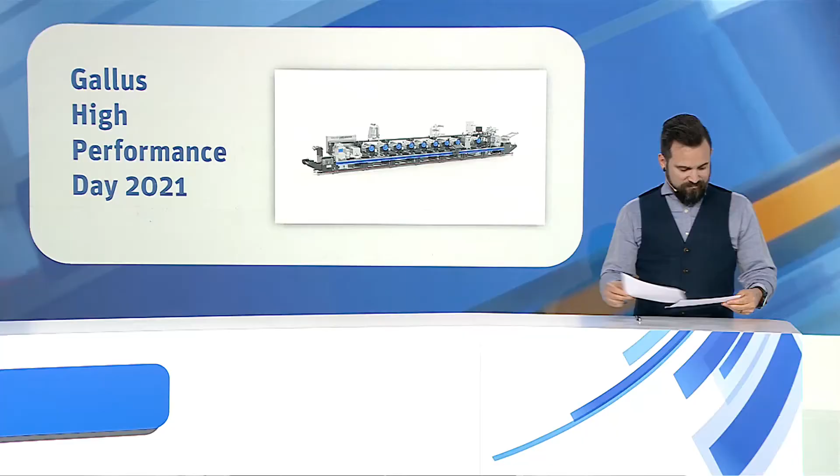You have decided for session B, where we present our Gallus Label Master, followed by a demonstration of the Gallus RCS 430. We will show you in detail the use of a digital print bar on the Gallus Label Master, and after the demo comes the Champions League of embellishment on the Gallus RCS 430. This machine is featured with a Pantec Rhino hot foil embossing unit.

Following these presentations, we kindly ask you to participate in one of our 3 breakout sessions. In session 1, I will talk to Martin Leonhardt. He will explain what low migration and GMP are all about. In session 2, I talk to Oliver Vetter. He's the head of the Screeny business unit. He will answer the question why screen printing is still a viable and indispensable printing process in the narrow and mid-web segment. And in the 3rd session, Vladimir Tilupin from Avery Dennison will show us which substrates are particularly suitable for UV inkjet printing and what needs to be considered.

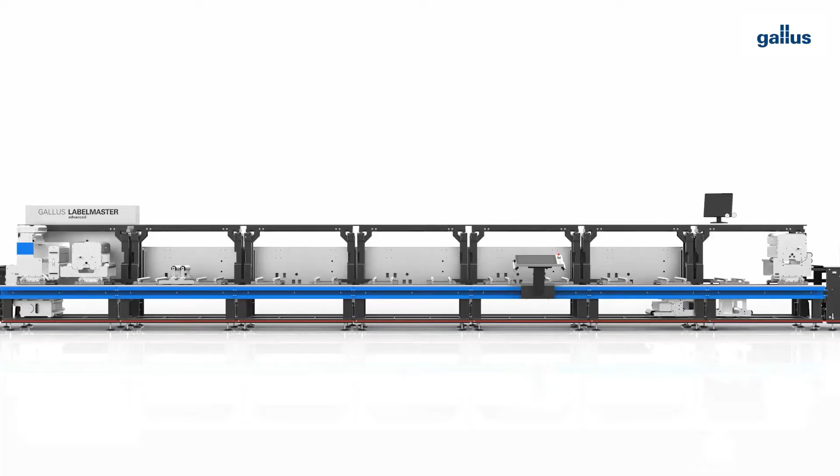It had its official product launch at Label Expo in 2017. Since then, we have sold more than 160 of these presses, the fastest ramp up for any new product in our Gallus history. It is the ideal combination press with high automation and maximum flexibility, which you can combine in unlimited ways. The machine system consists of several identical multi-process platforms.

Multi-process because the concept of the platforms allows us to do different types of operations. The Label Master is so flexible that you could print Flexo or screen in this position. But you also could do die cutting, hot foiling, or embossing. Even third-party equipment such as a web shifting device can easily be integrated. This is why the Label Master is called the most flexible press in its class. It is the perfect machine system for you and for your customer needs, not just today, also in the future.

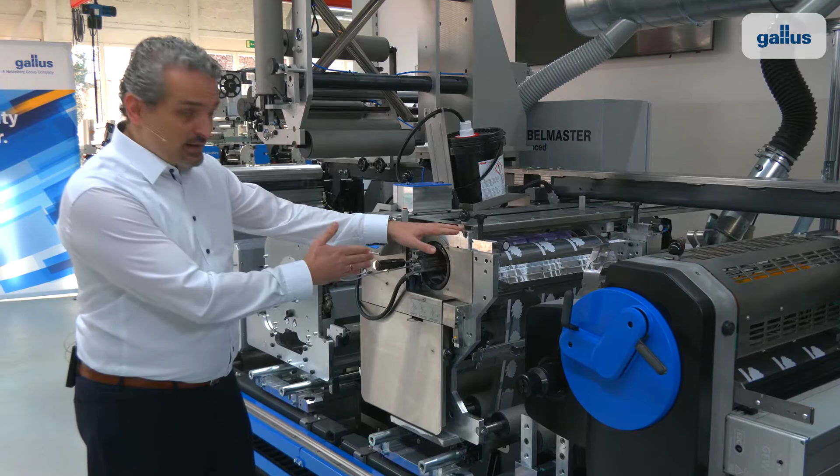The Gallus Label Master uses Flexo printing units in our standard, as you can see it here. But you can configure or upgrade it later with process flexibility. For example, on this machine, we have brought in a screen printing unit here in the primary process level. The Advanced line is fully flexible, which means you can change any process in any position. So for the first time ever, you buy only what you actually need and configure your machine to your own requirement. It's your choice. The Gallus Label Master with permanent processes in all positions, the Advanced, as this one here, with total process exchangeability, or any combination in between.

Let's have a look at the design of the Flexographic print unit. For example, these clamp and release systems of the printing cylinders and anilox rollers, or the adjustment wheels at the bottom here, are exactly where the operator expects them to be. So setup and control are intuitive and fast and can happen simultaneously on several printing units. We call it best spot interaction. It's just one of the ways in which the Label Master gets you right into successful production, beginning from day one with a minimum training effort.

The Gallus Label Master combines short setup times with high, reliable top printing speed up to 200 meters with a perfect print quality and maximum register accuracy, regardless of the substrate. Now, I will hand over to Leon, who will explain the technical features in detail.

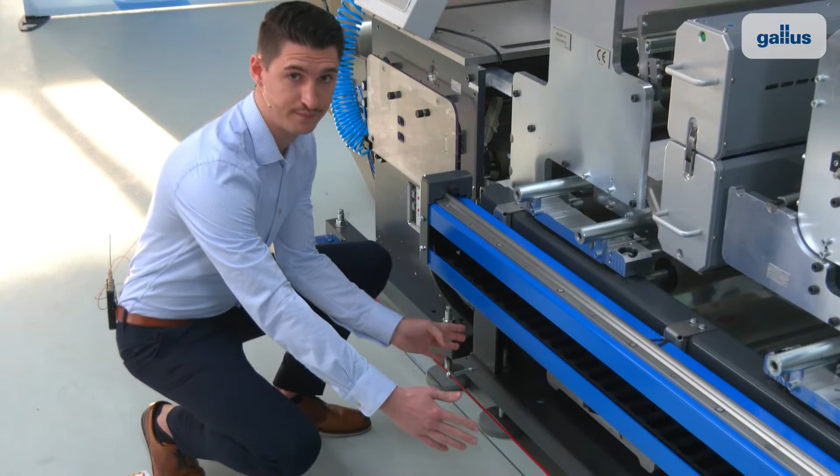After the unwinding, we have here the splicing table with the dancer rollers right here to ensure the optimum tension at the unwinding process. Starting from the web edge control, we are talking about the web conditioning area. And after aligning the web, we run it through the corona treatment in the third level here. There we optimize the surface tension, and next we have a both side web cleaning. At the end of the conditioning area, we have the first of two web tension control units. They ensure the perfect web tension during the entire print process.

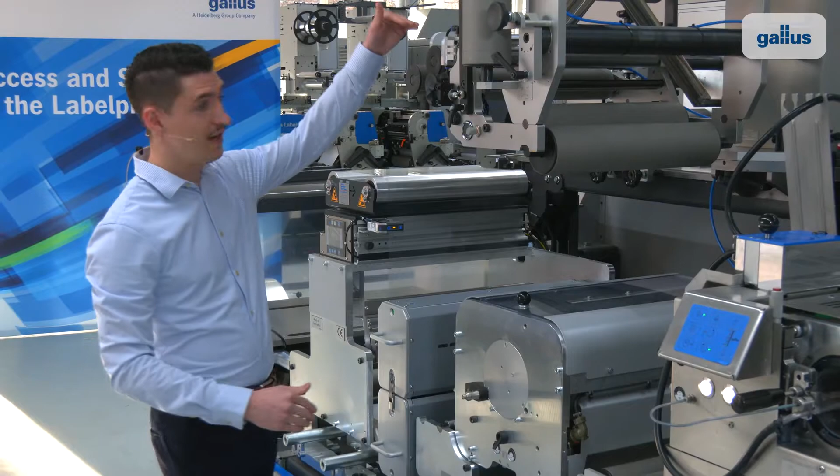At all Gallus presses, we are always talking about 3 levels. So we have here the primary level, the secondary level, and here the third level. One of our main philosophies is operator friendliness, and that's why most of the operations are on the primary level here. Here, for instance, you can see on the secondary level the web turn bar with the possibility to print on the glue side by using the delam-relam unit right here. In the third level, we have the possibility to integrate, for example, a hot air dryer for water-based applications. At this Label Master, we have an anti-static at each position to prevent loading.

Starting from the unwinder to the rewinder. And here it's an active one. Every multi-process platform has 2 printing positions. And here on the first position, we have our screen printing unit. While Werner is preparing the unit for the job, I would like to mention that not only the entire screen unit, but also the screen material is made by Gallus from our Screeny division. That means you get all from one hand.

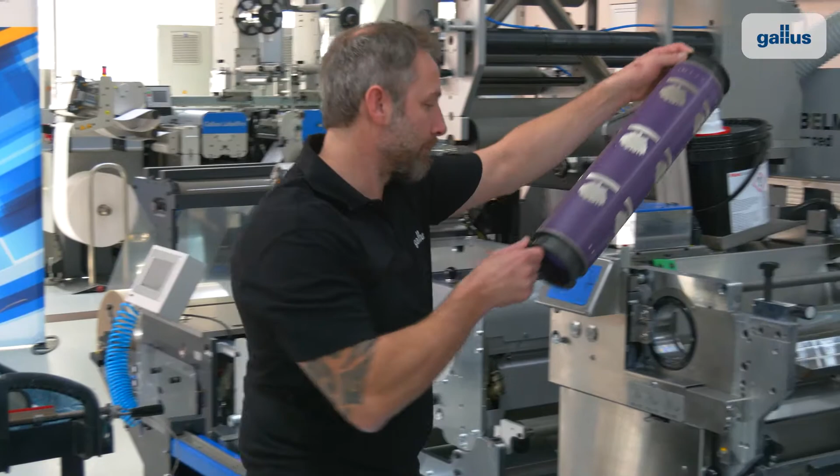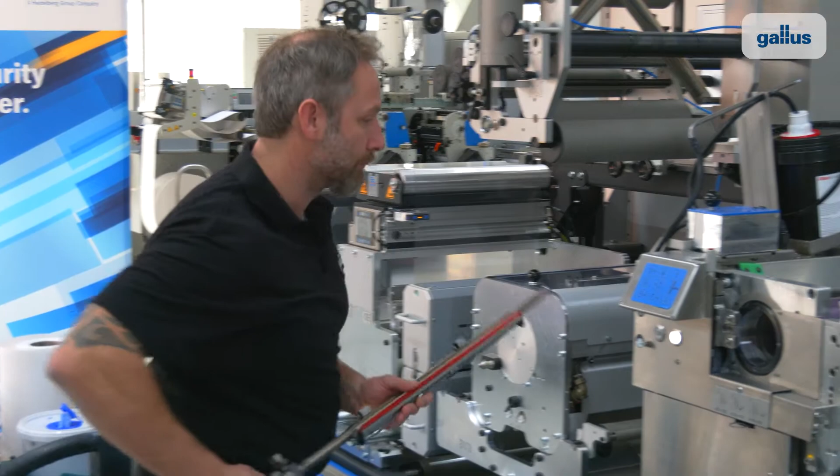The screen printing unit is on the primary level, which makes it very economical to handle. You can see the setup is really easy and quick. Our operator has to put in the screen cylinder, adjust the squeegee, and connect the hose for the ink supply, and that's it.

The setup of the Label Master flexo printing unit is as follows. The ink chamber with the anilox roller here is in direct contact with the printing cylinder in this position. At the beginning of the week, the operator is setting the pressure between anilox roller and print cylinder on this adjustment wheel here. By being able to adjust operator side and drive side independently, we ensure that the print cylinders are 100% parallel to each other. So, as I mentioned, this is done once.

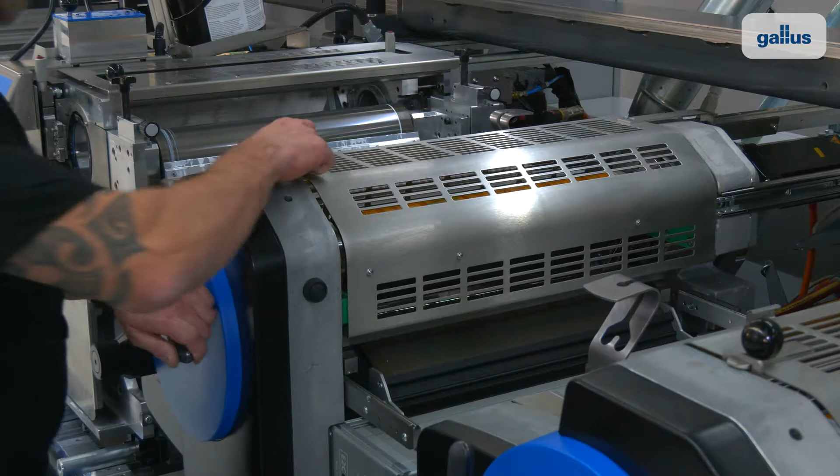The same function we have for the setup between print cylinder and impression cylinder, right here. This is how we achieve the highest print quality. At these 2 positions, we use these handles to open the anilox rollers and the print cylinder. We show you now how fast the operator can replace the cylinder. After he opened the cover and the clamp, it is easy to remove the cylinder and put it on the trolley. So then he takes the new cylinder and places it in the holder of the unit. As you can see, this takes less than 10 seconds.

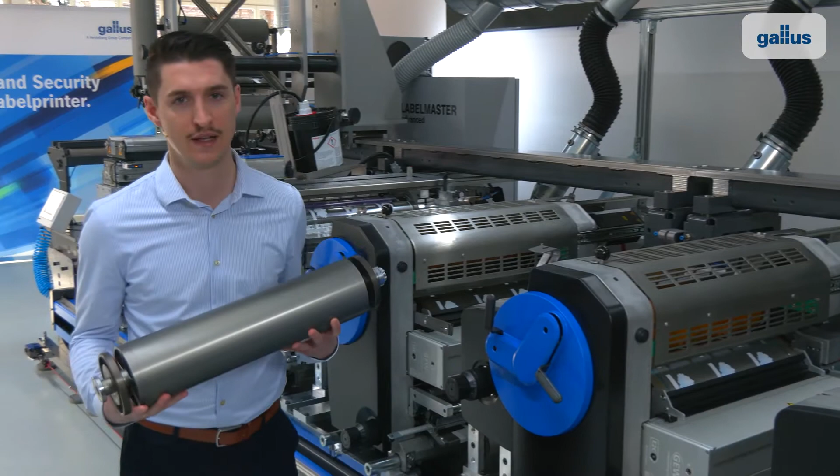So let me take one of the print cylinders to explain the concept. Thank you, Niels. First of all, you can see that I can hold the cylinder with one hand. It's quite light. This is a lightweight aluminum construction, but with a very robust design. It is solvent resistant with an unlimited lifetime, and the repeat range is from 8 up to 25 inch.

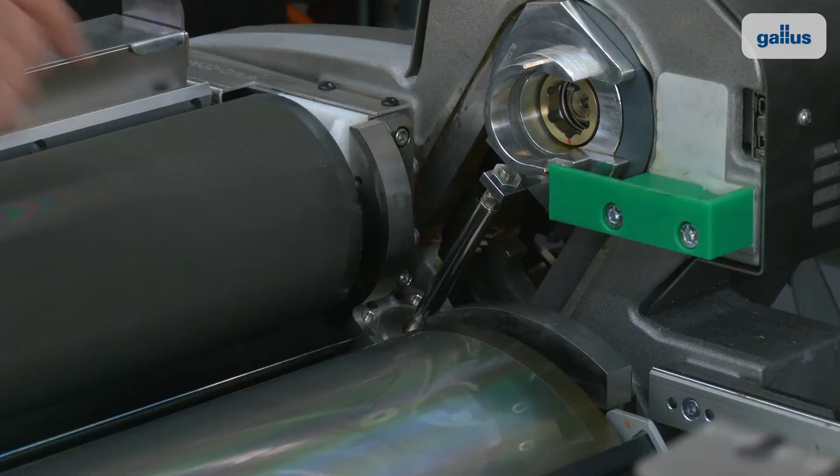So take a look here at these two metallic rings on the left and the right side. These are the bearer rings. They ensure that the print cylinder is always in the same position with the anilox roller and the impression cylinder. That means there is no under or over pressing, and we achieve immediately the required printing pressure. Thank you, Niels. Compared to other printing cylinder systems, Gallus cylinders give you a stronger print quality with lower cost and easier use.

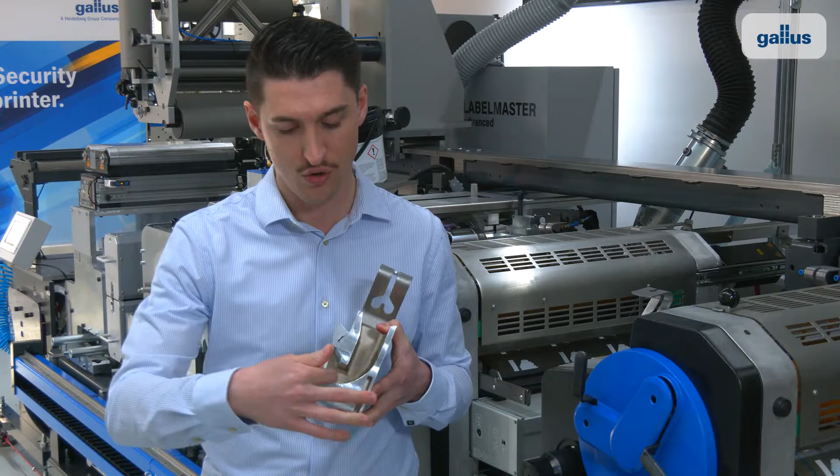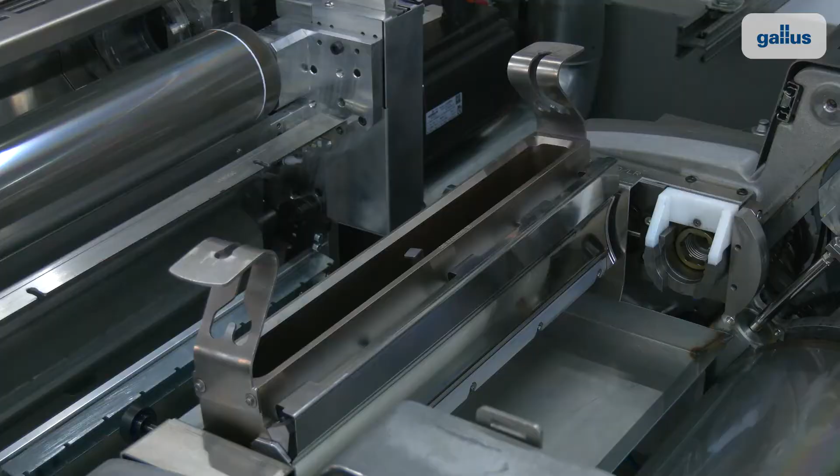So now we demonstrate how fast an anilox roller and the ink chamber can be exchanged. Let me first show you a cut through of one of our ink chambers. Thanks again. The chamber has a patented design. The surface is specially coated and has this round shape. This ensures that the ink is flowing automatically to the anilox, and we need the minimum of ink in the chamber. The surface and the form of this chamber also guarantee that there is less ink foaming. Thank you. So Werner could already insert the anilox roller and the ink chamber. We would be ready for production.

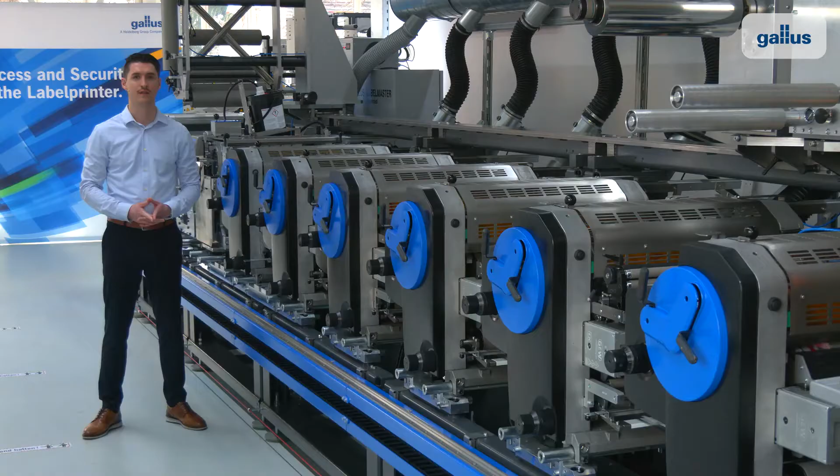Here, after the impression cylinder, we have the dryer. The impression cylinder is cooled, of course, to have a stable substrate temperature and best possible web transport. This setup allows us the shortest web path possible in our industry. So let's move forward to position number 6. Here we have the possibility to do cold foil embellishment. This is another process done on the secondary level. Same as the web turn bar, you can move it to any position of the press.

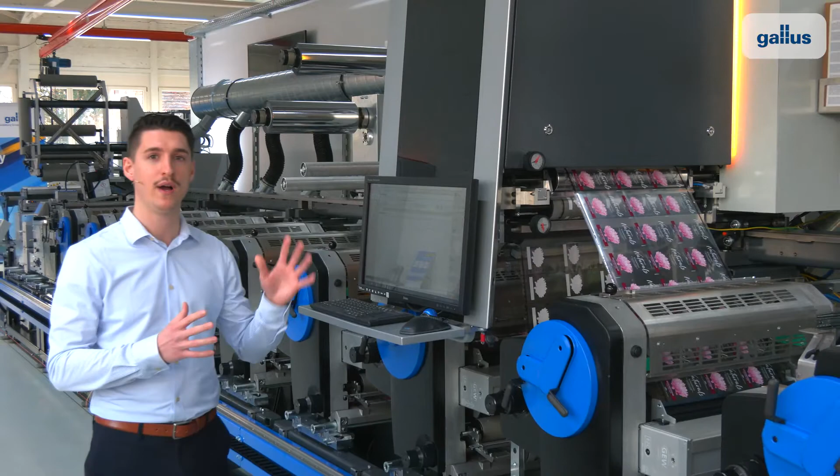And this brings us to the next highlight. This is our digital print bar white edition. In the application we are printing, we are able to vary the language of the digital text during the running production. It is also shiftable along the entire machine system on the secondary level and can print high opaque digital white for underlay or text with 600 dpi resolution, and that with speeds up to 70 meters per minute. We can apply a 10 micron ink laydown, which can give us a very nice relief effect. The good thing about the digital print bar is our easy to use interface that allows you to integrate it also into your other presses.

This here is our HMI press control. The touchscreen is movable and allows the operator to move it into any position he is working in at the moment. Also important, the main job presettings are saved in the job storage and can be easily recalled. This helps to achieve fast make-ready times for repeat jobs.

So let us talk about the register. The print cylinder concept, the printing units, and the process platforms are the reason why the Gallus Labelmaster is so stable in register. The Labelmaster has an automated length and cross register. But many customers, and Niels already mentioned that, we have over 160 installations, buy the Labelmaster without an automated control because of its high stability.

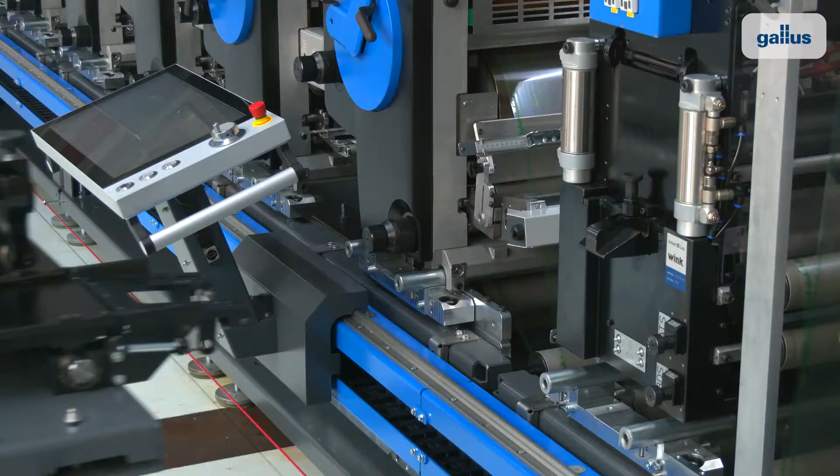At the next position, we are already on the outfeed section. Werner will now replace the die cutting cylinder. That's an easy job thanks to our new Gallus rotary die cut unit RDC Quick. And to replace the cylinder, Werner is now connecting the exchange trolley. The new cylinder is in parking position. The actual cylinder is already in the standby position.

So now he is just opening the side cover, takes out the cylinder and replaces it with the new one. A push on the touchscreen of the HMI brings the cylinder automatically back to the operating position. The entire change can be done in less than 30 seconds. The RDC Quick has a robust design with special impression cylinder support that guarantees consistent die quality even on thin PET liners. Another good feature is you can place this unit in any position of the press.

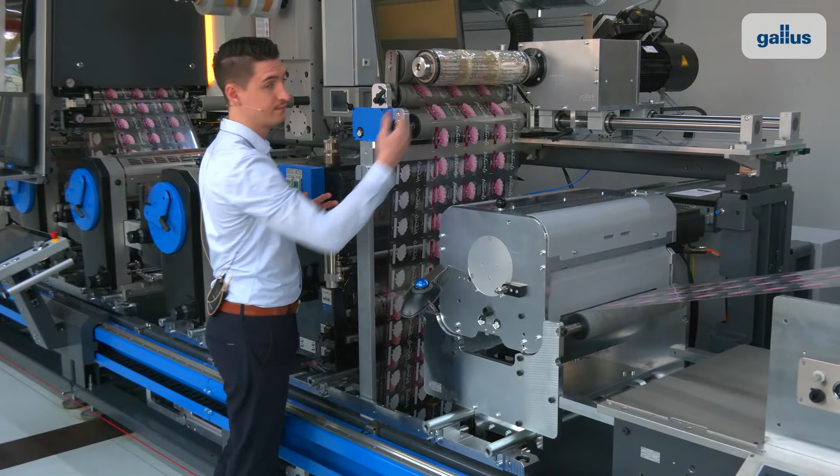So after the die cutting unit, we are coming to the matrix rewinder. We call it MR Touch. Touch because our roller here is in direct touch with the matrix roll. This allows us to rewind fine and difficult matrix shapes, and that without a risk of a break. Also, the roll becomes even and compact. But the most important thing, the matrix roll is at a good height to be exchanged by the operator.

Under the die cutting unit, we have the web video here, and it's motorized. Werner can adjust it with the mouse pad right here to the correct position of the register marks. At the screen up here, you will be able to see later the register accuracy of the Gallus Labelmaster. Same as in the front, we have here our outfeed web tension control unit. And at the end, we are rewinding finished labels ready to be shipped to your customer.

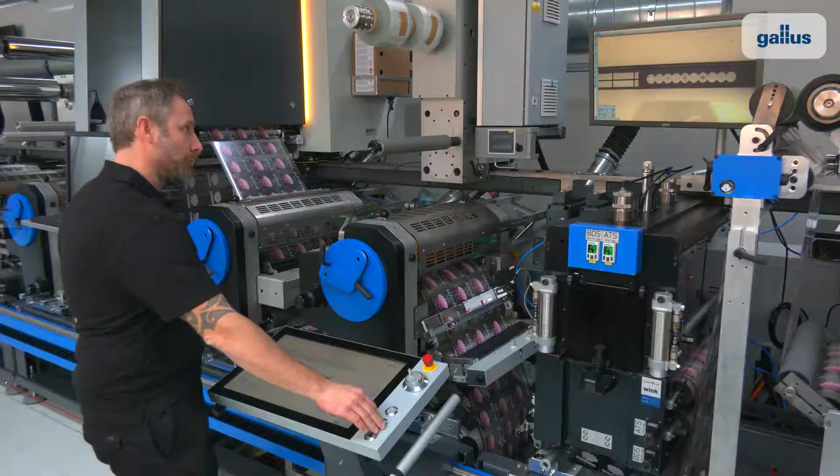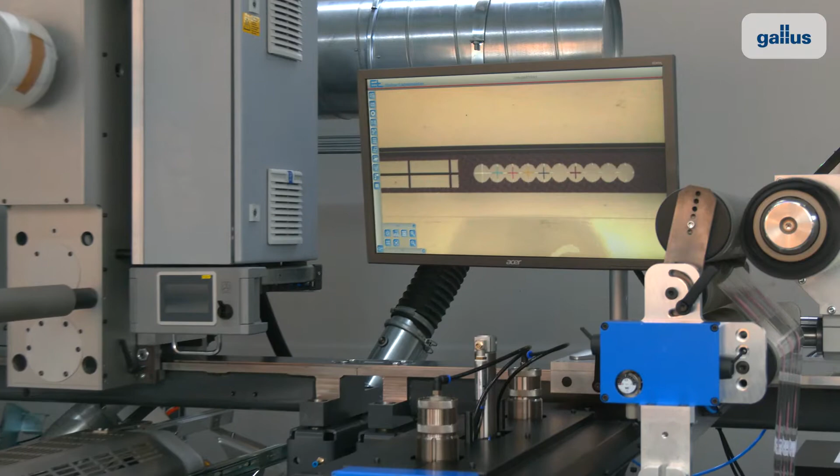So Niels, so Werner, I think we are ready to start the job now. Werner is quickly checking the impression of each unit before he ramps up to production speed. Afterwards, he is activating the register control, and the machine automatically regulates the printing into register by using web-to-web comparison with minimal waste of one machine length.

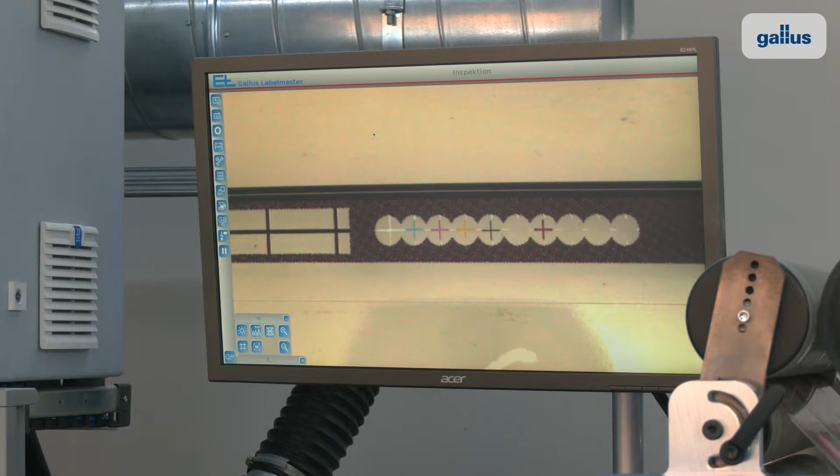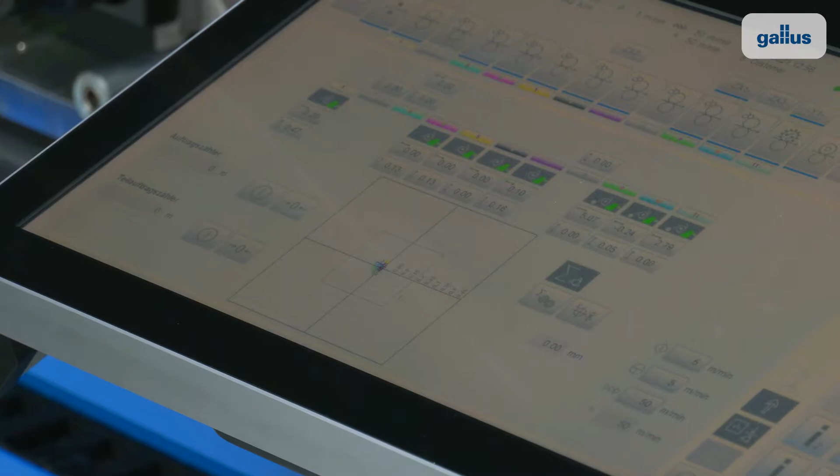On the screen up here, this is a screen of the web video, you can see that there is no movement at the register at all. Also here at the HMI, you can see that the register marks are quite centered and far below the tolerance. At the moment, we are running at a speed of 80 meters per minute. The Labelmaster is able to run up to 200 meters per minute. Of course, the speed is always dependent on the application. At this job here, we are doing special embellishments, so you need to reduce the speed to ensure the right quality.

As already mentioned, this digital print bar, white edition, is responsible for the variable text on our label. Everything happens with a simple click of a button. Werner can now change the language or an image while we are printing. Jobs can be loaded into the digital print bar by USB or Ethernet. On the job we are printing, variable text is added to some spots on our label.

Now let's have a look at our finished label. We are printing a shampoo label on PP clear substrate from Avery Dennison, starting with screen printing for a white underlay, followed by CMYK process colors and a spot color in station number 6, with an additional Sapphire spot matte varnish. Then the 10 micron digital white for the variable text is giving us a nice haptic effect, and finally the die cutting is finishing this label.

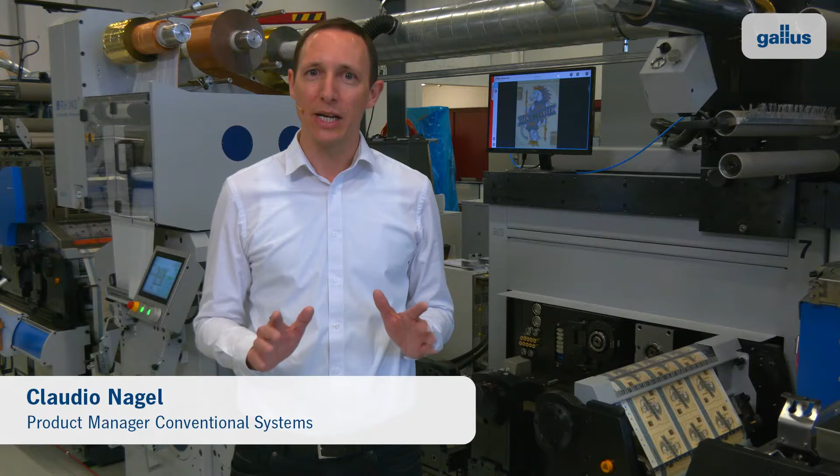The Gallus RCS 430 is in every aspect the flagship in our product portfolio, and I can also claim that it is one of, if not the best machine system in the label industry. Our customers who operate one or more Gallus RCS in their print shop supply the world's largest and most demanding brand owners with highly complex labels and packaging. This press proves every day that it is the most flexible and highly automated press in the narrow web market.

Dear visitors, we hope that you will be one of these customers in the near future. Within the next minutes, we will be guiding you through the unique capabilities of the Gallus RCS 430 and show that this machine is up to every challenge in a print shop. I will start now with a few technical explanations of the machine system.

The basis of the RCS is a very stable mechanical platform. This carries the independent stations which are equipped with the direct driven motor and interfaces which provide all media required, such as control system or compressed air, to operate the printing unit. The web runs independent from the installed printing process and doesn't need to be cut when the operator changes it. Thanks to that platform concept, the operator can switch between different printing units like flexo, screen, offset and hot foil within less than 5 minutes. This process flexibility and the certainty that this machine system is equipped for all upcoming challenges ensures future security.

Just as important as the mechanical structure, if not even more, is the control and drive concept. On this machine, we use direct servo drive technology. There are no mechanical transmission elements like gears or belts. The printing unit motor with cone clamping system is firmly connected to the printing cylinder axis, which carries the anilox, the printing or the impression cylinder. 3 identical drive sections are built into one printing unit, all accessible from the front and at an ergonomic height, regardless of the body size of the operator.

This system enables the optimized economic operation of the RCS. All other functions, such as the printing format and pressure adjustment, are also carried out by motors. Therefore, all job-dependent settings can be saved and recalled again for repeat jobs. This saves waste and reduces setup times massively.

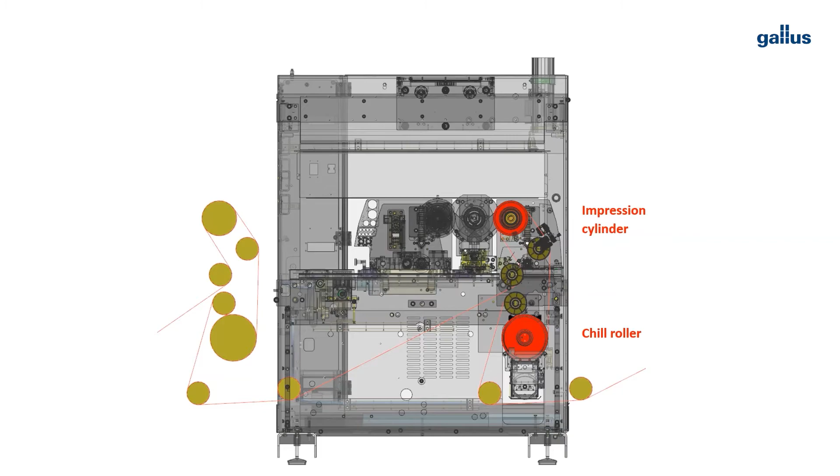This unique drive concept is as well the base for the outstanding web management of the RCS. 2 servo-driven rollers, here shown in the animation, the impression cylinder and the chill roller, with a large wrap angle, ensure perfect substrate transport and enable advanced functionality like the intelligent presetting function and the printing length correction. This leads to perfect substrate handling for pressure-sensitive material, monofoil, tube laminate and light cardboard, and finally to excellent register accuracy and reproducibility.

So let's have a look now to the configuration of our demo machine, which enables our very special label we have prepared for today. Leon will explain that press now to us in detail.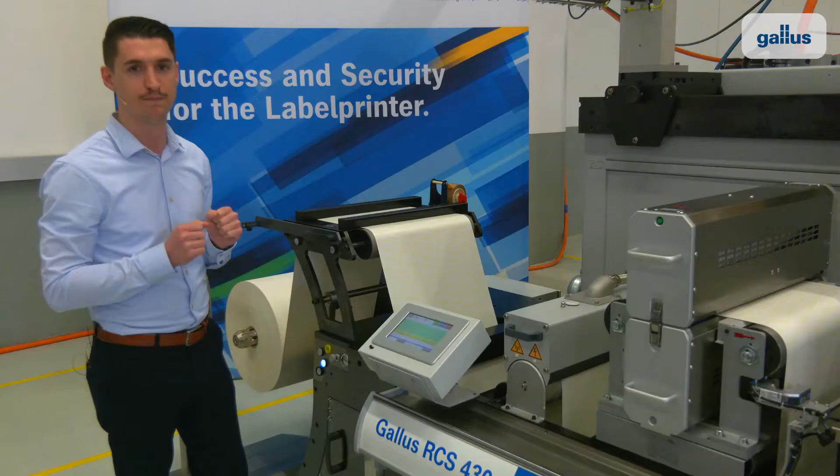For this job, we need in the first position backside print on glue. So that we are able to print on the glue side, we have to separate the liner from the pressure sensitive material and overpass it here to the relamination unit. With the top material, we can now run through the print unit and print on the backside of the label. Afterwards, we have to go up to the secondary level, relaminate the 2 layers and turn the substrate for our front side print.

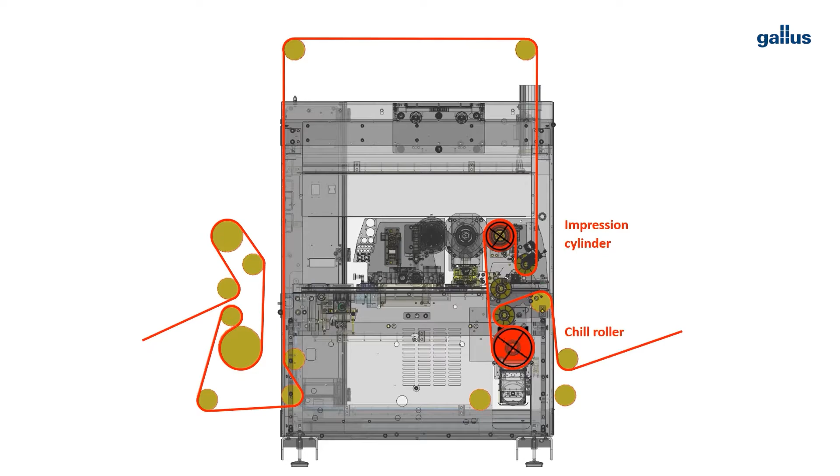For monofilm applications, we have a special solution for reverse printing here on the RCS. We can run the entire flexographic unit backwards, and that gives us the possibility to print on the backside without using the web turn bar. This will avoid scratches on transparent monofilms to 100%.

On this job, we are printing on a structured paper. And to achieve the highest quality, we print that image with the next 5 units in offset process. With every other printing process, it's impossible to get this quality on this high structure substrate. The RCS features a unique startup process that sets the ink-water balance inside of the unit before something is printed, and Igor will show this quickly.

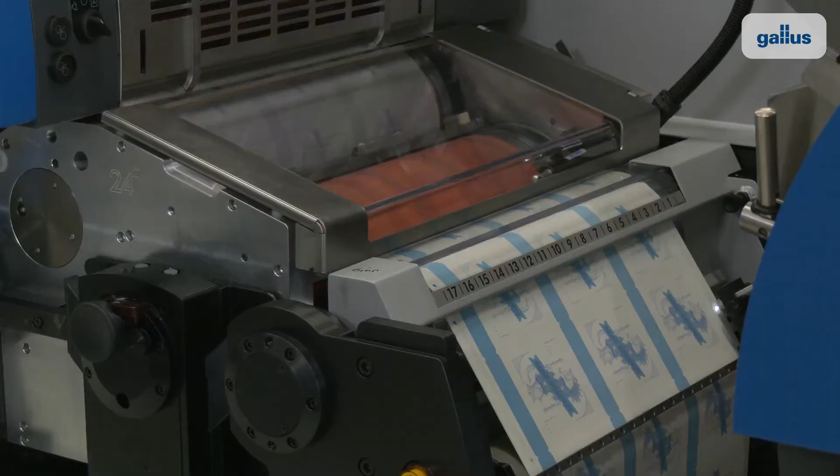The inking unit turns at 40 meters per minute, while the web just moves at 5 meters per minute. We make this possible by the use of the already mentioned individual drives on the Gallus RCS, which ultimately leads to a very low level of waste.

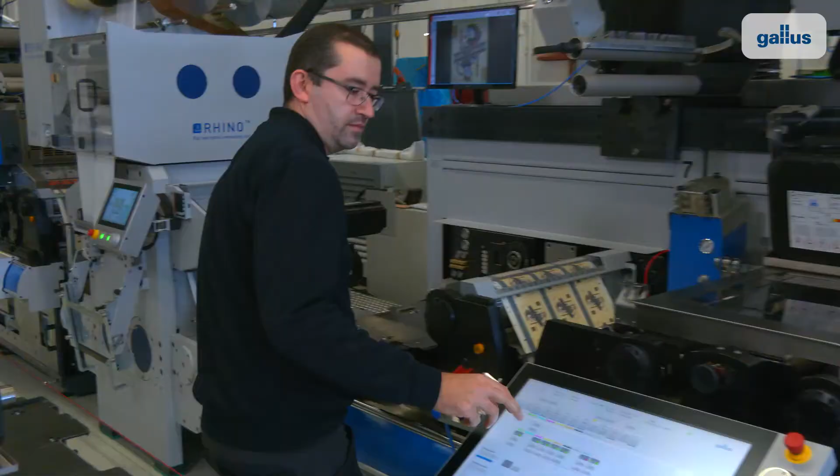That we can guarantee the consistently high print quality over the whole lifetime of the machine, we decided to use format cassettes, which contain the rubber blanket and the printing plate. The investment for this system is slightly higher than on sleeve solutions, but on the other hand, more stable and more reliable. So now we will show you how easy it is to do a complete process exchange on the Gallus RCS while the machine is running a job. Let's see how Igor will do that.

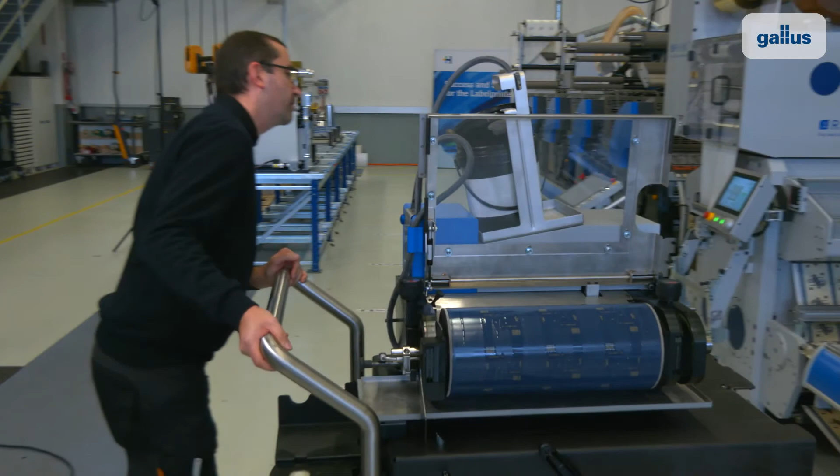The platforms are designed in such a way that the units can be disengaged, exchanged and re-engaged on the fly without stopping the production. This is made possible by the unique design of the printing units, which consist of 3 independent servo-driven platforms. The impression cylinder platform moves the substrate. The plate cylinder platform controls the printing cylinder, and the third platform moves the inking unit.

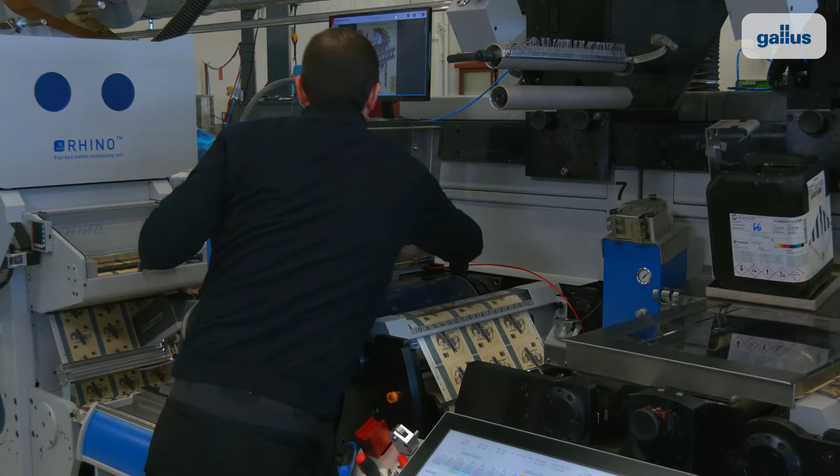This enables us to freely combine different printing methods such as offset, flexographic, screen, hot foil and die cutting on the same platform, and being able to change between them quickly and easily and without cutting the web. Machine operators love the system. The handling processes are identical everywhere, which reduces operating errors.

The Gallus RCS 430 control system identifies the relevant processes fully automated via a chip. This sets the printing unit up for the new process. All important data about the particular unit are now available on the HMI, and the process is ready to print.

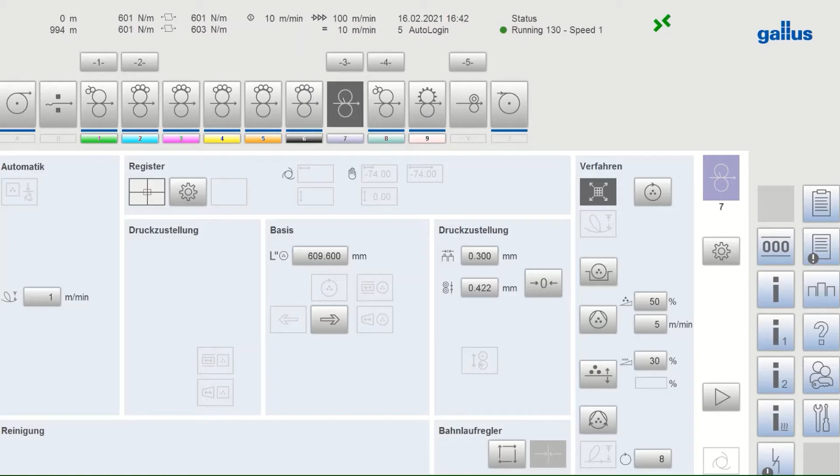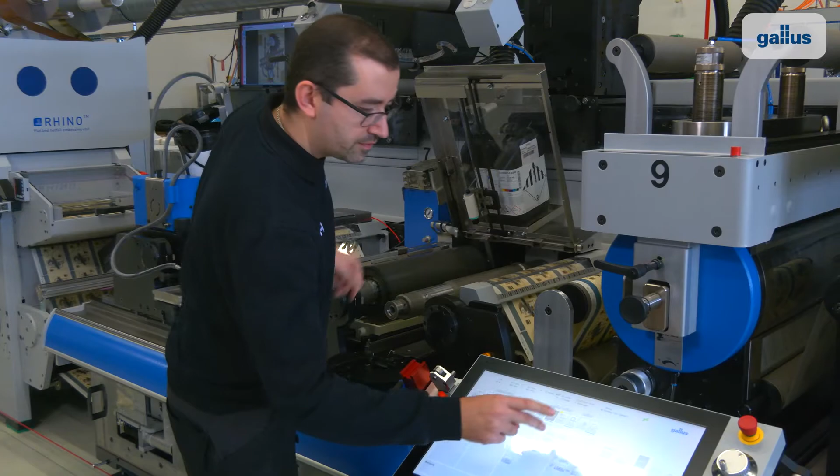So a haptic varnish is applied with this screen printing unit, which enhances the look and the feel of the label. On the last printing unit, we put a matte varnish to our label before we die cut and rewind it. The aluminium sleeves for the print cylinders and the Anilox rollers are light and do not deform. This ensures a reliable production over the whole lifetime of the machine.

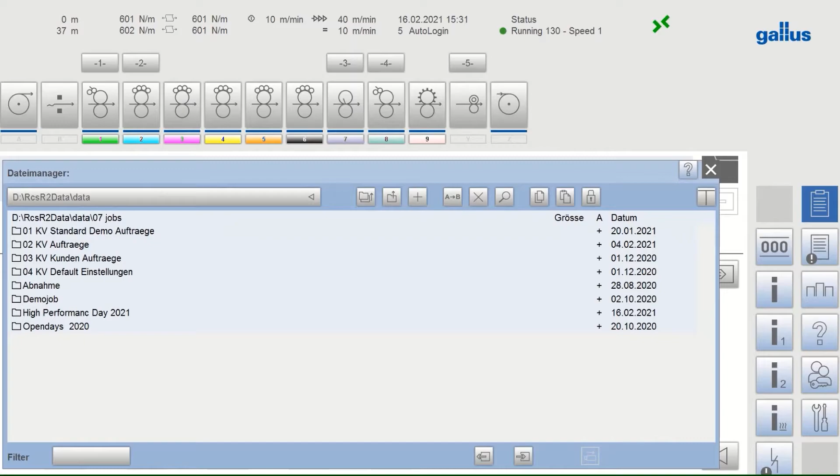Because all settings are motorized, they can be saved and recalled for each individual job. We can save the register, the substrate settings, corrections of the repeat lengths and other specific information. If you take into account that in a print shop usually a third of all orders are unchanged reorders and another third only contain small changes, then you become aware of the advantages of this fully automated machine system. It saves your waste, reduces downtime and leads to a reliable production process.

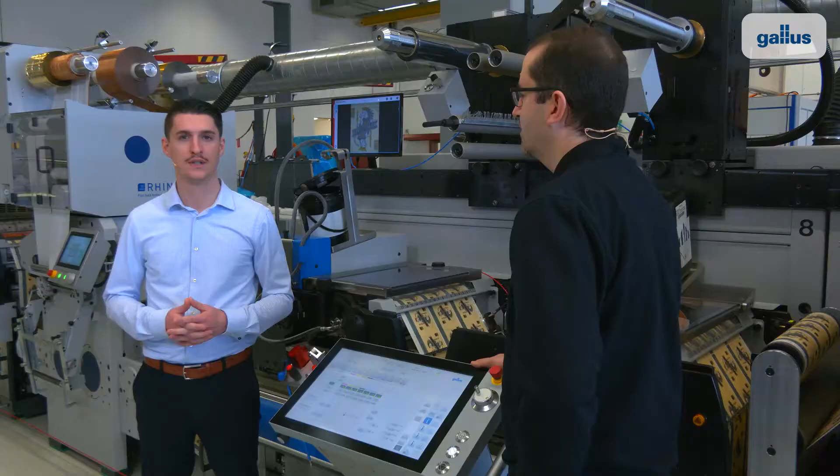So Igor, let's pick out some day-to-day challenges in the print shop and see why these cannot appear on the RCS or how they can easily be resolved.

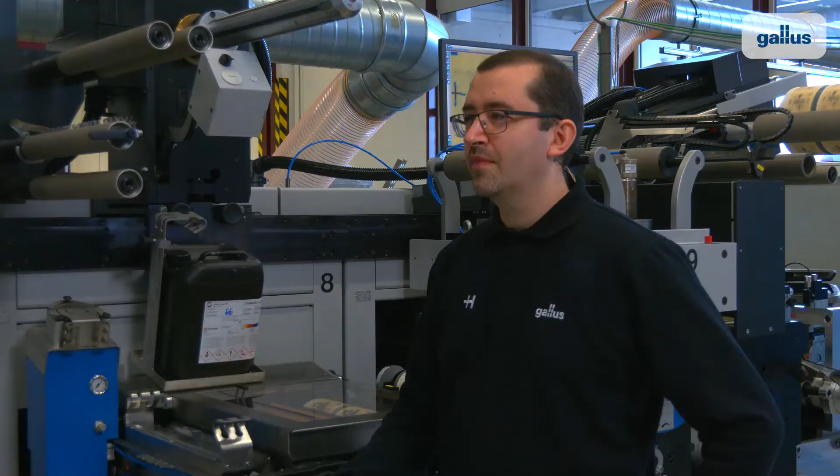Keyword gear marks and Gapschlag, which means we have vibration stripes caused from the printing plate gap. First of all, we have no problems with the gear marks, because we only use the directly driven servo motors. We measure every motor and we are using only the most precise ones for the printing cylinder, because this has the biggest influence on the high print quality.

If there are still problems with Gapschlag, you see this, for example, when you print full surface, we can counteract this with the directly driven anilox roller. We can run the anilox with a slightly different speed than the cylinder. So you can achieve a kind of elimination of mechanical clearance. This enables us to solve the situation quick and effective.

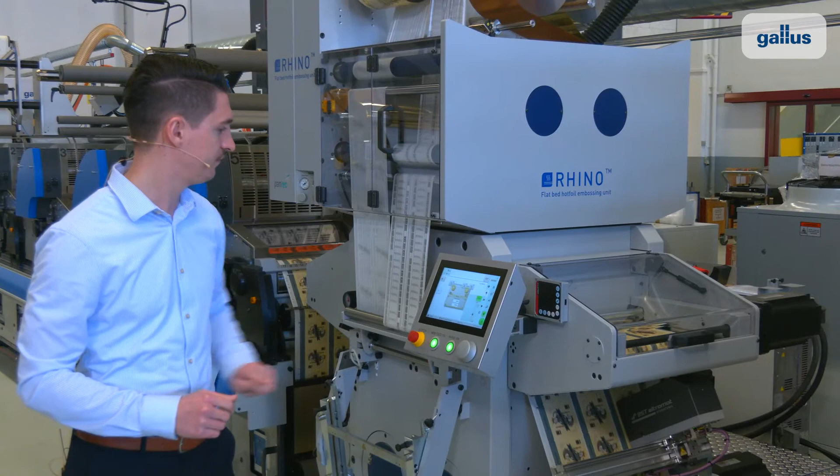Great, thank you Igor for your explanations. So let's have a look on this impressive unit here. Here in between the printing units, we have the flatbed embellishment unit Rhino S from Pantec installed. Flatbed technology allows you to produce highly embellished labels with low tooling costs. The Rhino gives you the possibility to create metallic effects through hot foiling, haptic effects through blind or micro embossing, and a focus point on the label by placing a hologram in register.

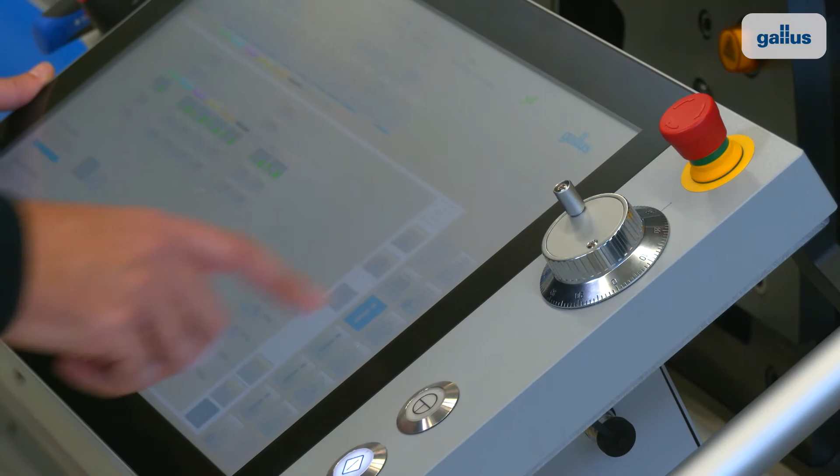Thanks to the high stroke frequency of 8 strokes per second, the Rhino will not slow down your printing speed. The embossing force of 60 tons guarantees that the embossing quality, the height, and the sharpness of the edges will delight your customer. Igor, please start the job. I guess our visitors want to see this impressive unit in production.

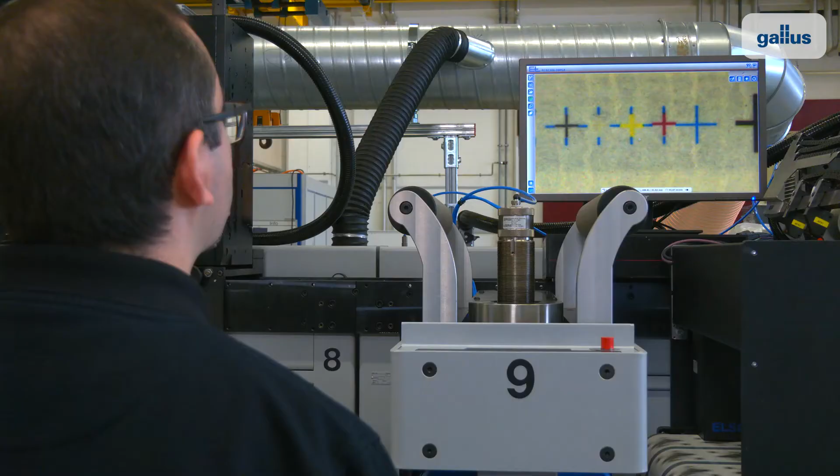As already mentioned, all job-depending settings can be recalled easily for repeat jobs. Igor did a process exchange of our screen printing unit and is now very quick back in production thanks to our unique presetting system on the RCS. The Gallus RCS is equipped with a register control in length and also cross-register as standard. The operator has to activate the web-to-web comparison mode, and the machine regulates the print automatically in perfect register.

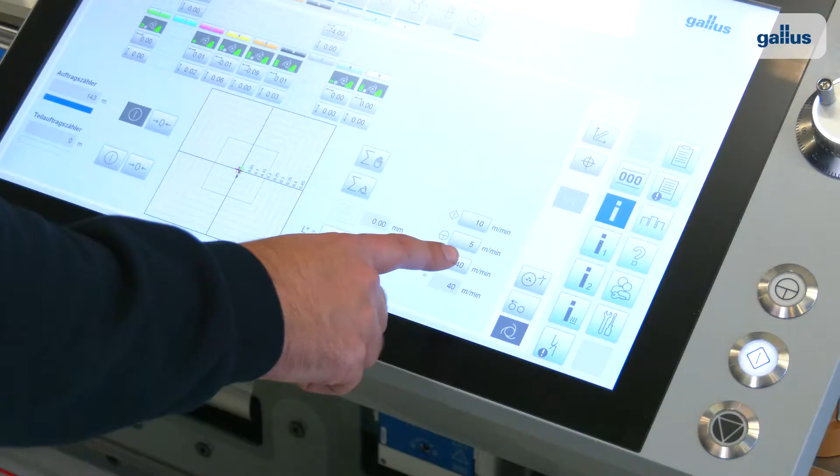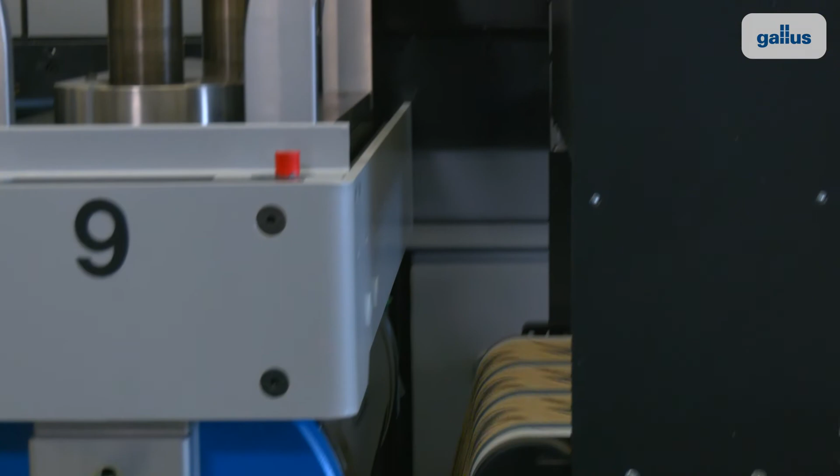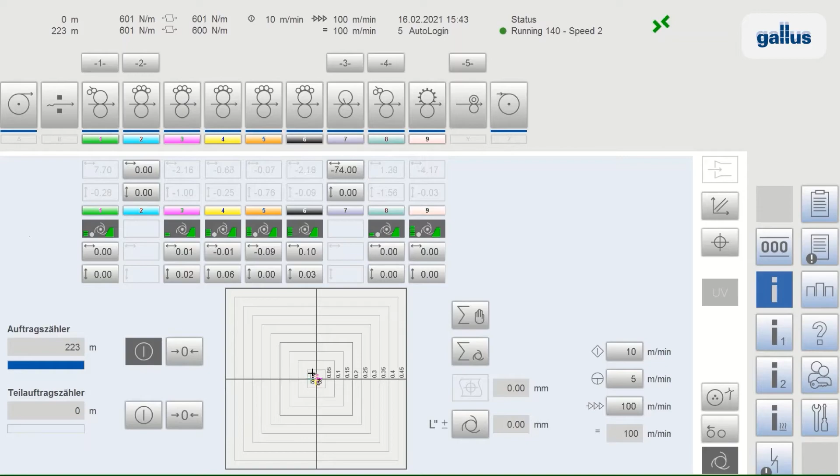The special Gallus register mark pattern in combination with the sophisticated optical characteristics of the reading unit enables almost unlimited combination as well on silver and transparent substrate and inks. Igor will increase the speed now to 100 meters per minute, and you can hear that something is going on here, and we can even feel it. But when you look on the web video, you can see that there is no movement at the register. Everything remains stable, and even when the speed is ramped up, nothing will move. The logging data also shows an impressive run of the register curve.

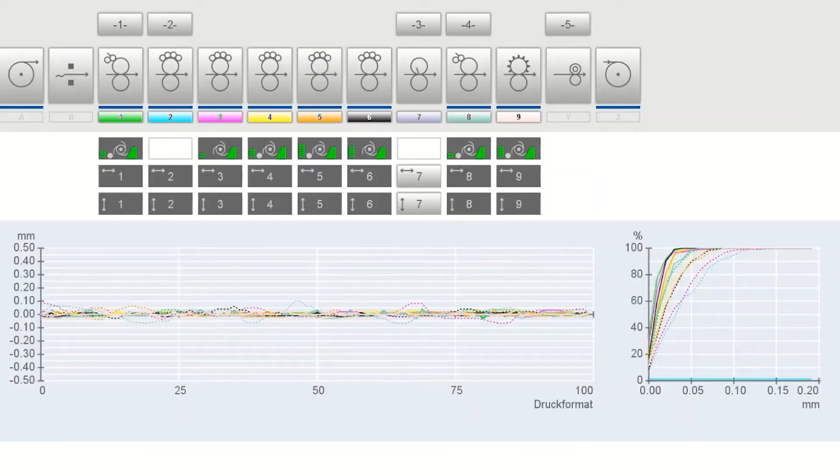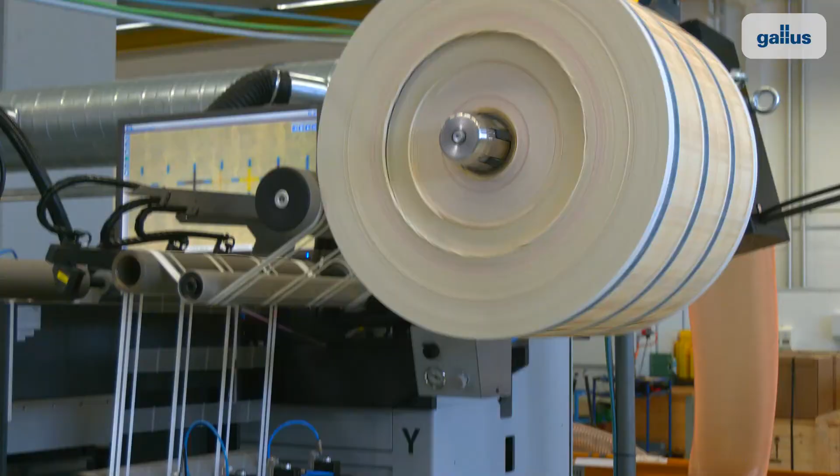So let's have a detailed look to this label that we have printed today. This here is our Game Changer label, designed to show you the strengths of the Gallus RCS 430. The working horse stands for quality and reliability. The cheetah for speed and flexibility. We see here a highly embellished label with 5 offset colors, hot foil embossing, a relief varnish applied with screen, and a matte varnish printed with Flexo.

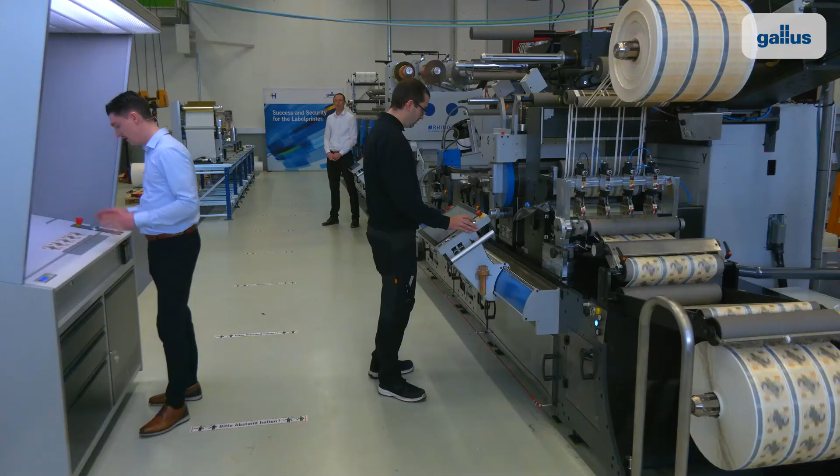The biggest challenge of this aquavit label is to integrate all printing processes in the correct format lengths and a perfect register on the front and back side. These are added value options you can only get and use in an efficient way with this level of machine flexibility and performance. The inline die-cut, slit and separated labels are now ready to be shipped to your customer.

So let me quickly summarize why the Gallus RCS 430 is still the most economic machine for combination printing and solves the greatest challenges in the narrow web market. It offers total flexibility and future security in all matters. All printing processes can be used and exchanged on all printing positions with minimal changeover times. The substrate doesn't need to be cut, and in combination with a unique presetting system, the machine ensures minimal waste and significantly reduces setup times.

The robust design, combined with the pioneering control concept, allows you to reach the highest printing speeds with unmatched quality. The Gallus RCS 430 is, 20 years after the first delivery, still the flagship of the label industry.